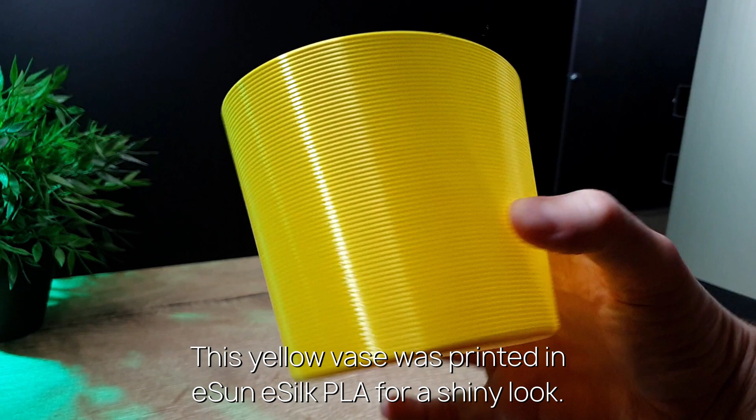Here's how I sliced this flexible vase. This yellow vase was printed in eSilk PLA. It provides a shiny look. This one was printed in black Polyterra PLA.

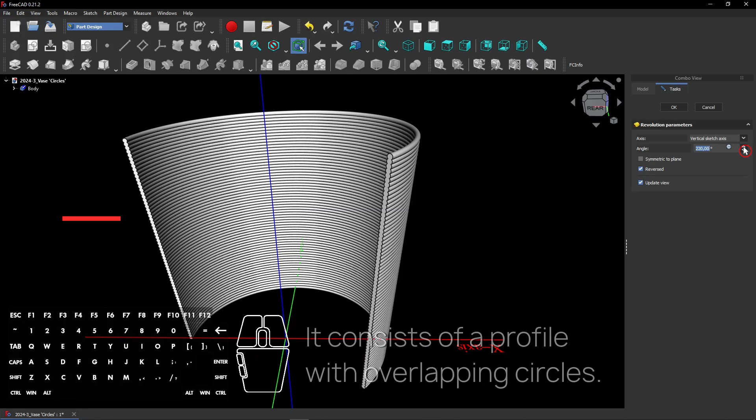The ridge is in fact a row of almost circles. Let's have a quick look at this. It consists of a profile with overlapping circles. The sides are flexible, but the bottom is not.

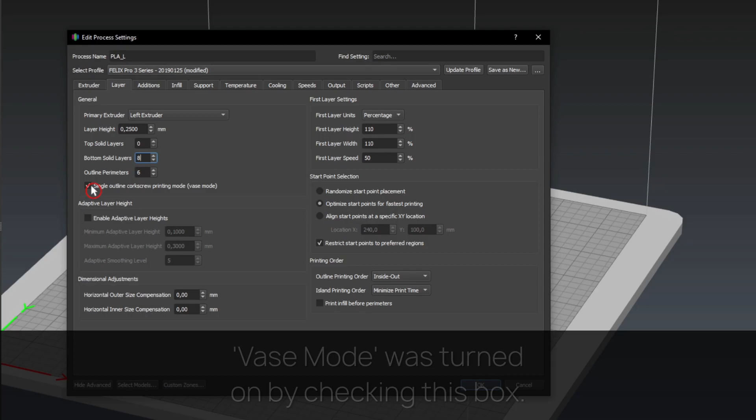Let's have a look at how I sliced this in Simplify3D. In vase mode, the number of top layers must be set to 0. The 8 bottom layers make the bottom firm. Vase mode was turned on by checking this box. The outline will be printed in one single spiral move.

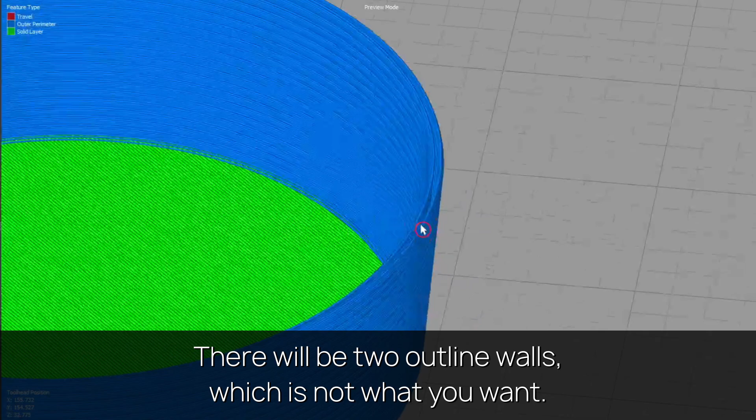The slicing behavior must be set to merge all boundaries. Normally it's set to positive fill. This is how that looks in vase mode. There will be 2 outline walls, which is not what you want. Let's change the setting to merge all boundaries. There's only 1 outline wall now, which is how it works in vase mode.

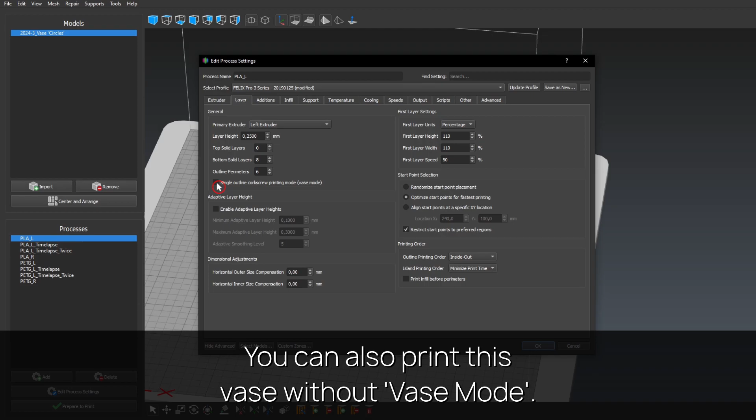You can also print this vase without vase mode. Merge all boundaries needs to be disabled. Let's change it back to the default positive fill. Now you will get a very sturdy vase, but it will take much longer to print. This sturdy one will take around 5 hours instead of 3 hours and 40 minutes.

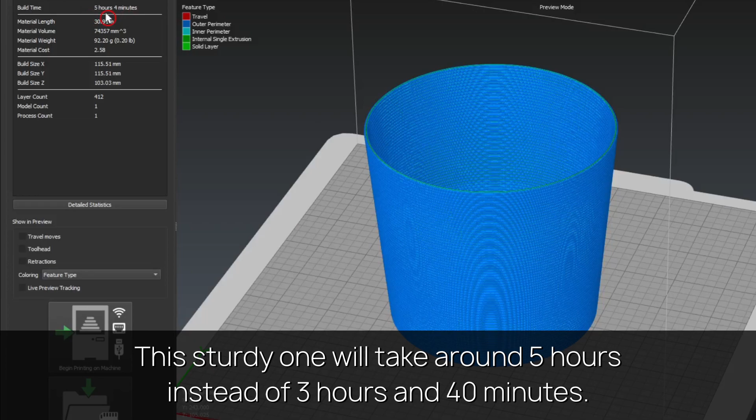The vases in this video were both printed in vase mode. This one will replace the metal vase you may have seen in my other videos.